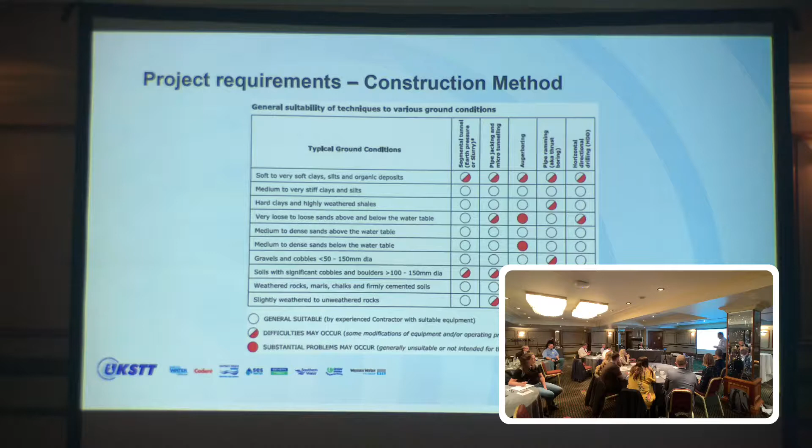Importantly, there are all the different methods, not necessarily an exclusive list, but across the top there we've got segmental tunneling, pipe jacking, auger bore, pipe ramming and HDD. This is kind of a typical, if you like, rule of thumb table for when some of these methods apply to the project that you've got. I won't go through that exclusively, but it's important to realise that there are all of these methods, and whilst we're concentrating on pipe jacking today, there's a process of selection that goes through and that leads you to have a pipe jacking proposal.

So some key factors that will affect the performance, affect the construction method, will be the end user requirements. So whether they want man access. So for example, if you put in a horizontal directional drill, you won't necessarily have shaft structures, you won't necessarily have a tunnel or a pipe to be able to get into.

The accuracy of the final product pipe in its location. So again, if you're looking at putting in a rising main, very often they can be drilled in on an arc. They're not that sensitive to the need to go through on gravity. Whereas obviously if you've got a gravity sewer with two fixed points, you've got to go from A to B, so you need more accuracy.

The diameter, design life could be an issue that you need to consider. In some of these instances, I'm thinking now of highway projects where they're perhaps looking for a 120-year design life, that could lead you towards a solution where you need precast concrete, and hence things like auger boring, but particularly pipe jacking might be more prevalent. The depth below ground level, the length that you need to go with your trenchless section.

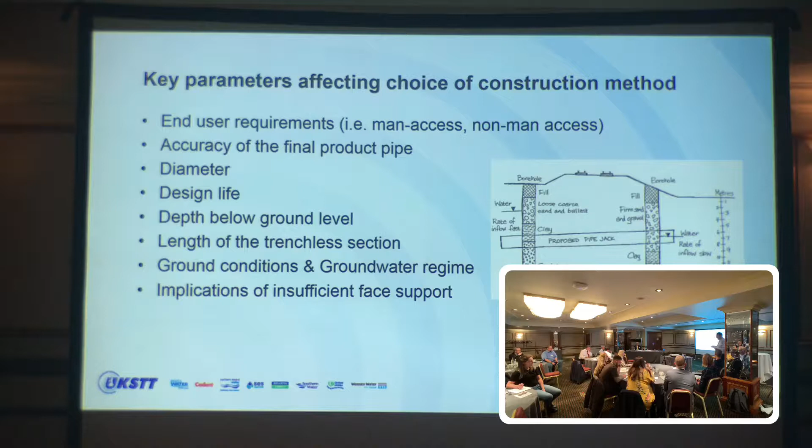Key one that I'm sure will come up quite a lot today. Everything will come back to risk, and embedded with the risk is the ground conditions and then the groundwater regime. The implications of not having enough face support with any of the methods. So face support, or indeed support around the tunnel or the pipe that you're installing, is inherently linked to settlement and in some instances heave. The presence of nearby services, and whether you've got any overlying structures, any building foundations, or any other features, so water courses, canals and things like that.

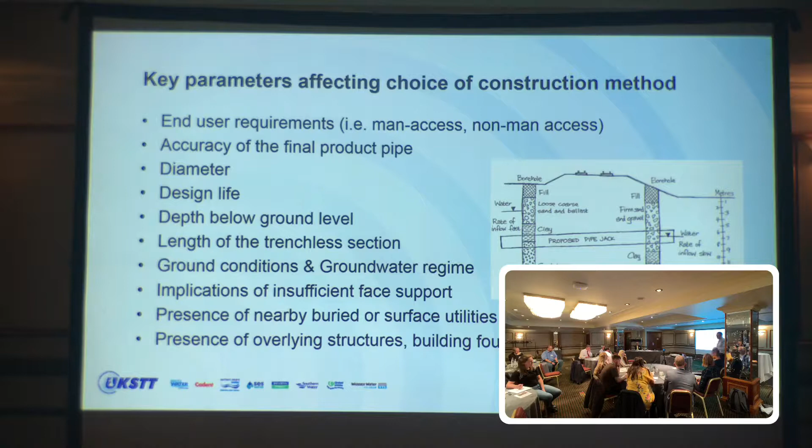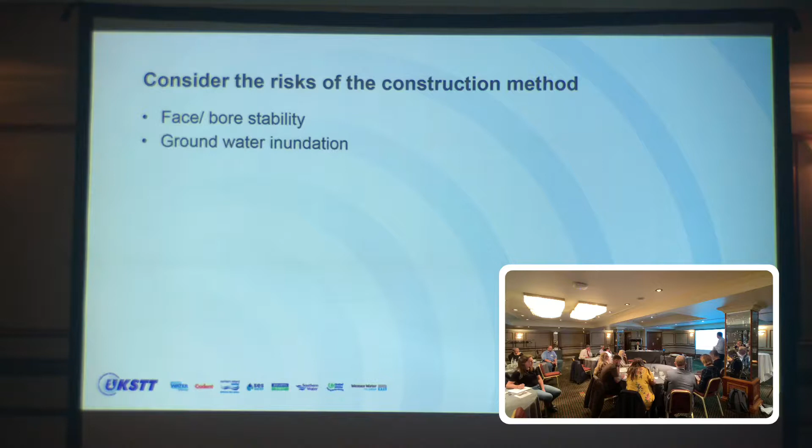Just briefly to look at some of the risks of construction. Face or bore stability, so the ability of the ground to stand whilst you're installing the pipe jack. The potential for groundwater inundation. Whether you could release any hazardous material, so if you're going through the ground and you may be in old landfill material where you could hit pockets of methane. Unexpected voiding, so mine workings are a prevalent risk, always in the ground in different areas of the country, obviously, where mining was concentrated.

Changing the groundwater regime, so by that I mean dewatering. So if you then go in and start to draw down water levels, that can have implications. Maybe it's fair to say, as an overarching statement, that if you employ a dewatering solution to assist in a scheme, you'll probably encourage settlement. Unexploded ordnance.

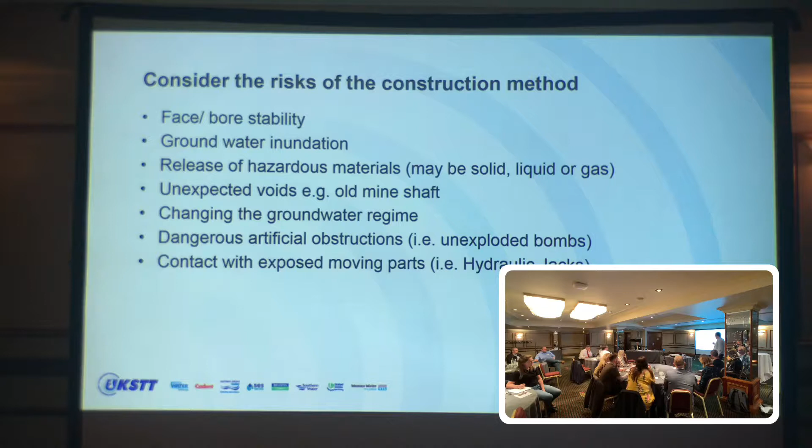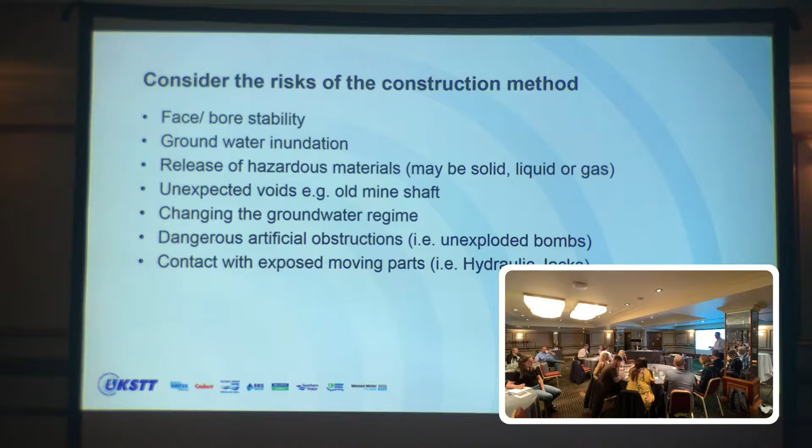Moving parts on the machine. Some of these systems will have more moving parts, depending on shaft diameters and shaft depths and working space and setups. It could be more risky to personnel. The amount of equipment that you need at ground level, so cranes, excavators, things slewing across, and whether that can fit into the site that you've got. Power supplies and materials are always a risk, maybe common to all.

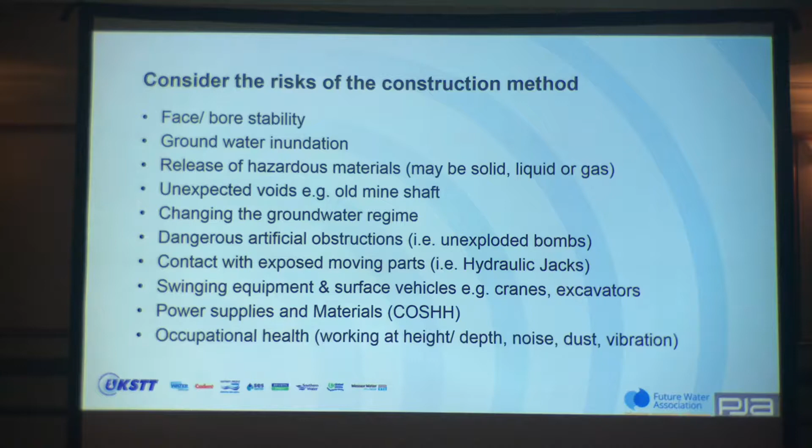And then occupational health, so some of the methods, and indeed some of the things that we're going to talk about with the pipe jacks themselves, can have benefits in terms of certainly noise, dust, vibration.

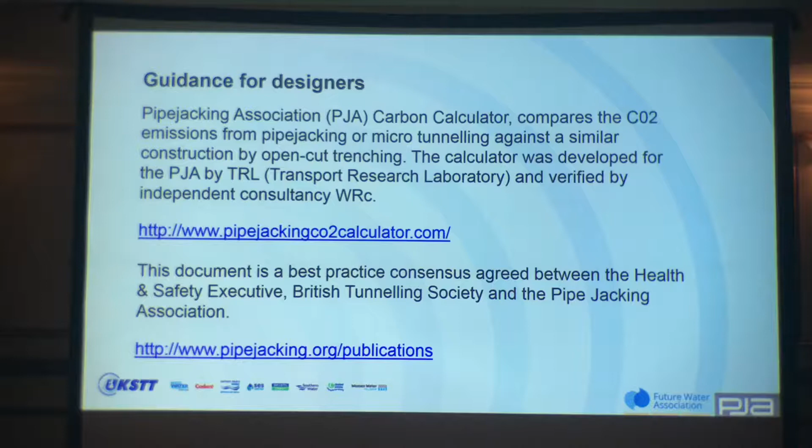When you're looking at things at a concept stage, there are a couple of things that you can also look at that certainly the PJA have promoted. So one is the carbon calculator. Now that does a direct comparison for a pipe jacking solution against an open cut installation.

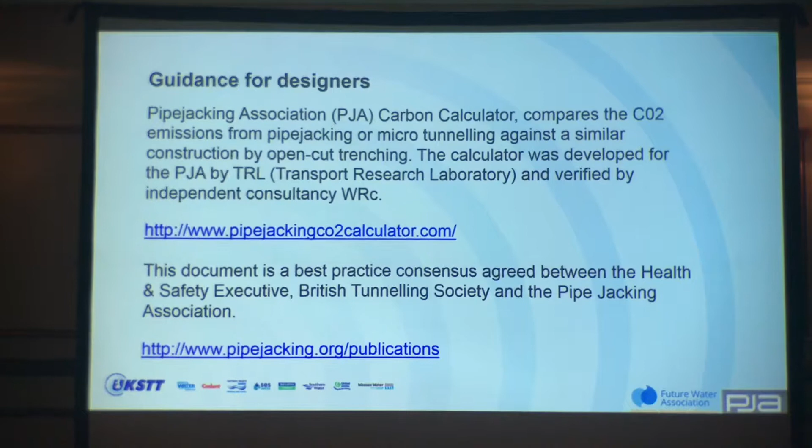So if you've got a job and you're trying to decide whether or not you could open cut it or whether you could pipe jack it, you put in a series of variables. I think it's kind of the length, the depth, the diameter, and what it does is it does a CO2 check to try and help you understand where it might be more beneficial to go to a trenchless solution.

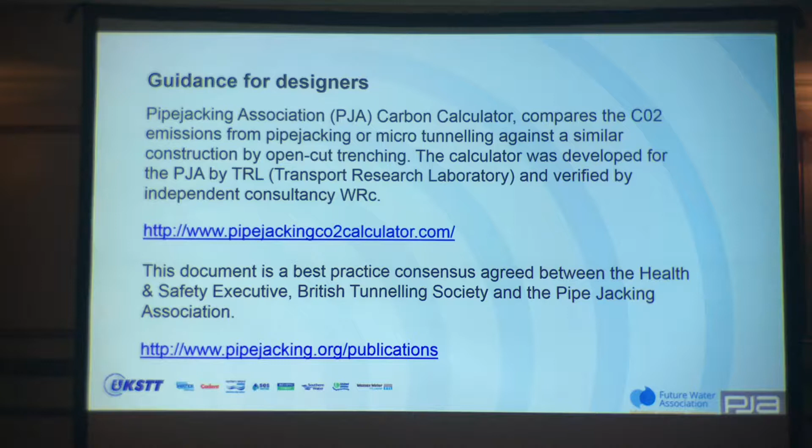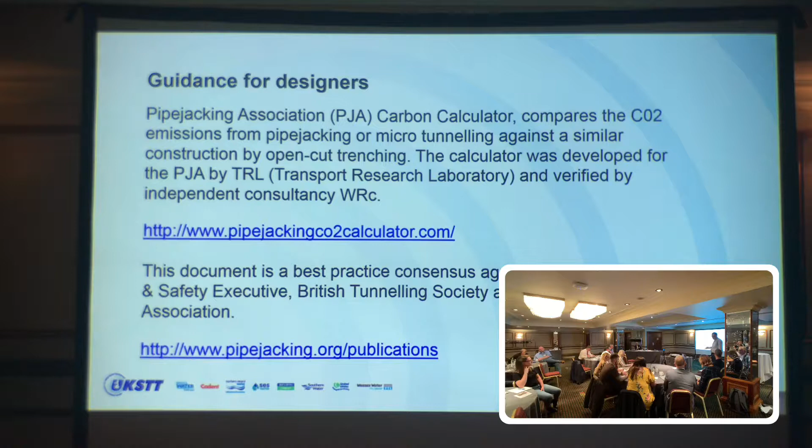And the second one is the guidance document that many of you will know, Guidance for Designers. It was a document that was produced between the Health and Safety Executive, the British Tunnelling Society and itself, which is that document there. I'm going to pick up the two sections to that just in a little while.

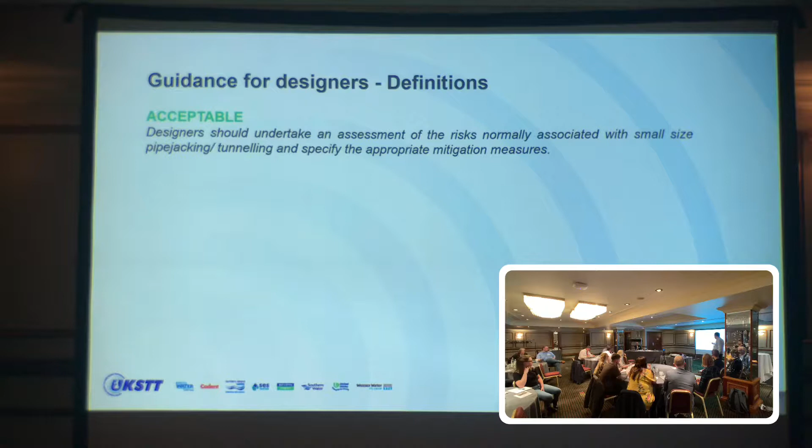But the Guidance for Designers gives you some advice on diameters for pipe jacking and lengths, and it's got a series of definitions. So you'll see on the table, and when I come on to the next slide, I'll go through it. But you'll see there's the red, amber, green. So green is effectively where designers need to undertake an assessment of the risks, if you like. It's the normal risks that may be associated with the pipe jacking method.

Amber is to avoid it, so if you like, you can see there that it's stepped up, so the designers need to undertake a robust risk assessment, and you need to propose suitable mitigation measures. You may need to seek advice. This is a bit of an old term there with the planning supervisor and coordinator, but you may need to seek advice across the project, and if you like, you need to demonstrate that what you're doing is the right thing to do.

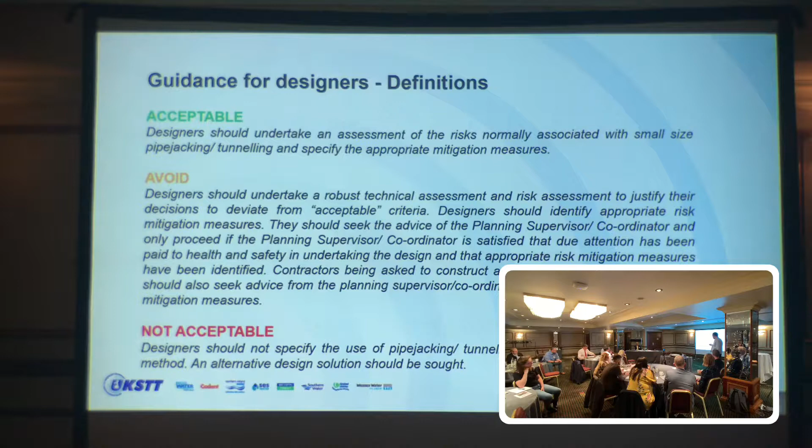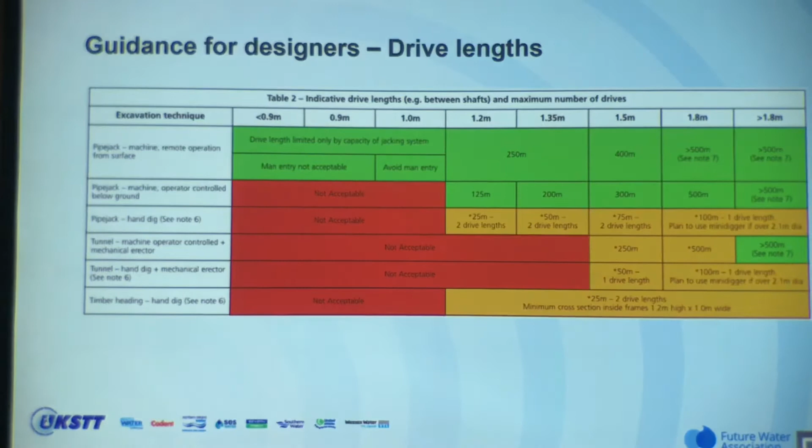So you can see that really, along the top line you can do most things, but say for a pipe jack, second line down there, a pipe jack where the operator needs to control the machine from below ground, straight away that doesn't become acceptable until you're at a diameter of 1.2. And the second part of that table is on drive lengths. So again, if I go again for line 2, the pipe jack controlled from below ground, you've got a diameter of 1.2, and so the suggestion is that the indicative drive length is about 125 metres.

Now I would say in terms of this table that obviously technologies do move on. I can't remember the date that this was agreed. It's about seven or 8 years old, I think. But this is currently under review as well.

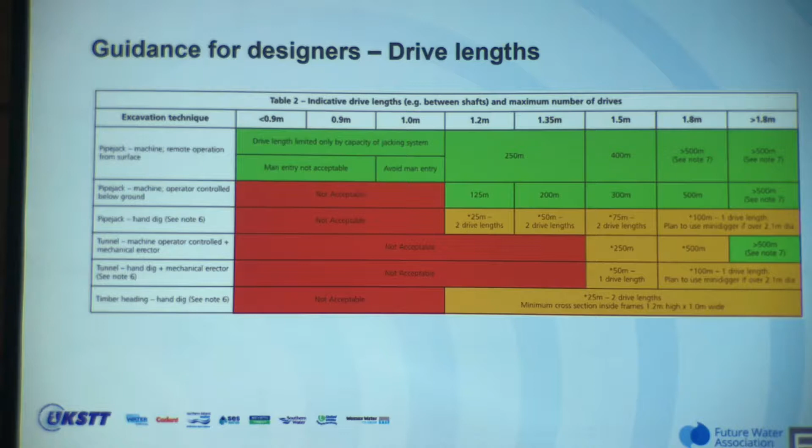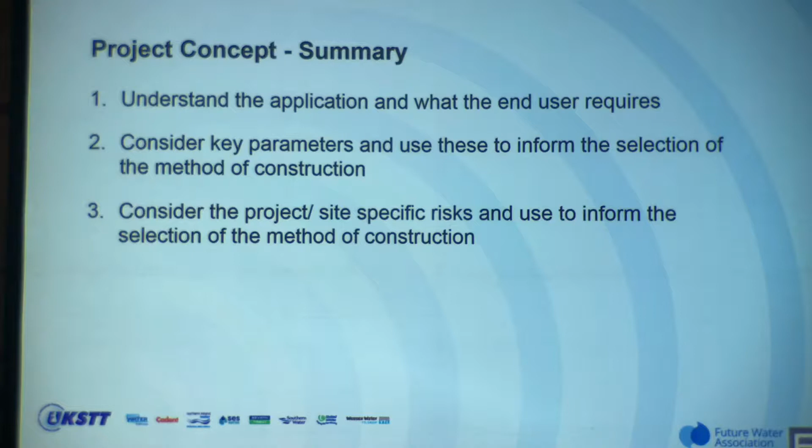So just in summary, you need to understand the application, particularly what the end user wants out of the job. You need to consider the parameters and use those to inform the method of selection. Consider the project and the site-specific risks again, and use those to inform the method of selection. Refer to any best practice and adhere to that practice where you can, and that will help to set notional diameters and indeed shaft locations.

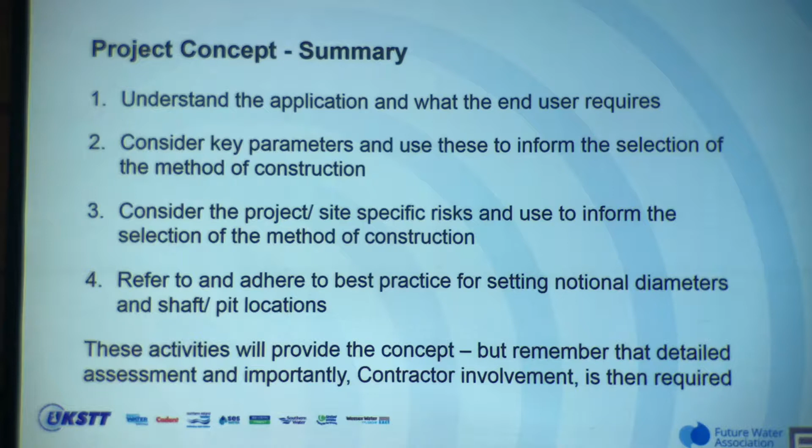And if you do all of that, those activities will provide concept, but remember that's not a detailed design. At that stage you really need to go on to do the detailed assessment, but importantly that's really the point at which you need to involve a contractor to start talking to them about the plant and the equipment and the limitations on that plant and equipment.

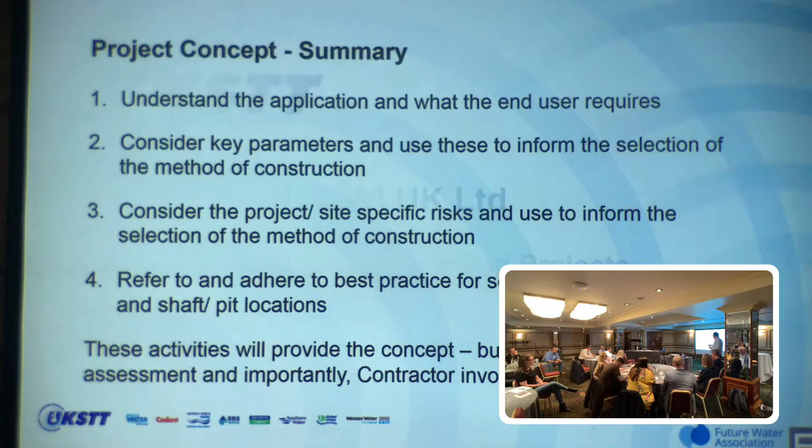So that's just a bit about the concept. I'm now going to hand over to Dave, who's going to talk a little bit about site investigation.

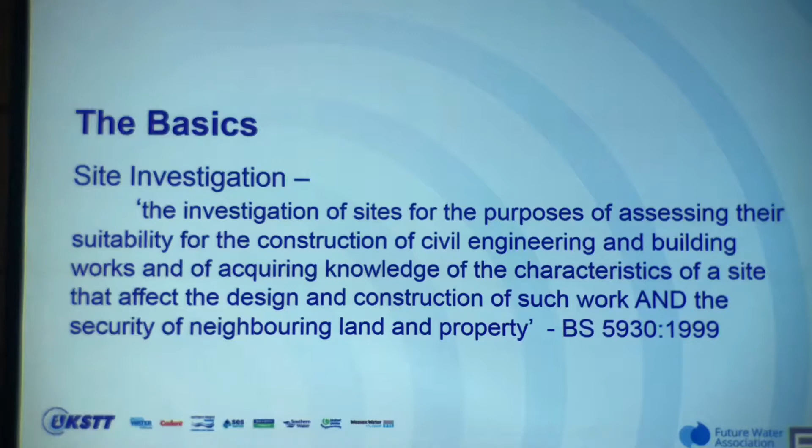I've emphasised the 'and' bit there because obviously with trenchless construction, we're generally building under something, so we've got to consider what you're building underneath and the effects you may have. Just going through the basics again. Site investigation, SI, or ground investigation, GI. Now site investigation, I tend to say, studies the site as a whole. You're not just looking at the ground conditions, you're looking at the geographical setting, land use, hydrological setting, historical land use. This all informs the picture of the ground conditions as a whole.

The ground investigation is the actual intrusive or non-intrusive works where you have your exploratory holes, in-situ testing, CPTs. Your non-intrusive works can be GPR, ground penetrating radar, seismics, resistivity, all pulled together to give you a picture of what the ground is that you could be constructing through. What's it like for a pipe jacking project? Well, it's much the same for any other project really. You're trying to confirm the ground conditions, what you think's there, confirming what the early stage studies have informed you, which I'll go on to later, and identify ground risks to the contractor and the development as a whole.

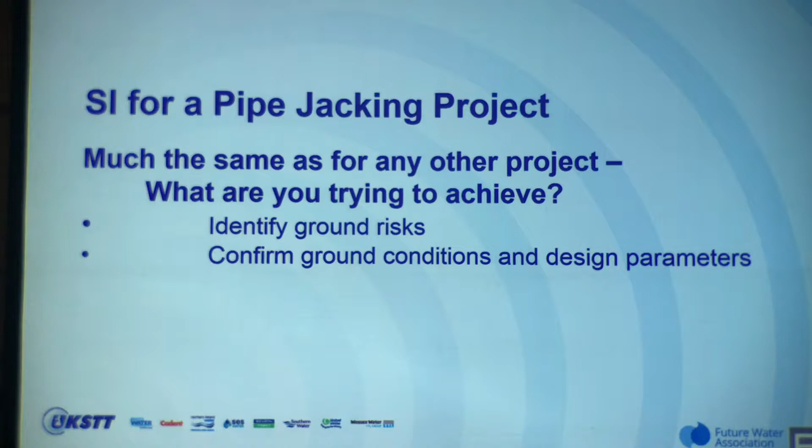First steps, desk study. Pipe jacking generally is a small section of a longer scheme, and the desk study will generally be done for the whole scheme, so you'd hope that a lot of this work won't be just particular to the pipe jack element. There'll be a site-wide desk study, as is more often the case. What you need to look at is geographical setting, which gives an idea of what the ground conditions could be, and as Jim mentioned, infill ground or past land use will give you an idea of the ground conditions or any risks. There's a lot of information available that's free to view for your desk study, related to geology, flood risk mapping, aquifer maps, UXO surveys as well.

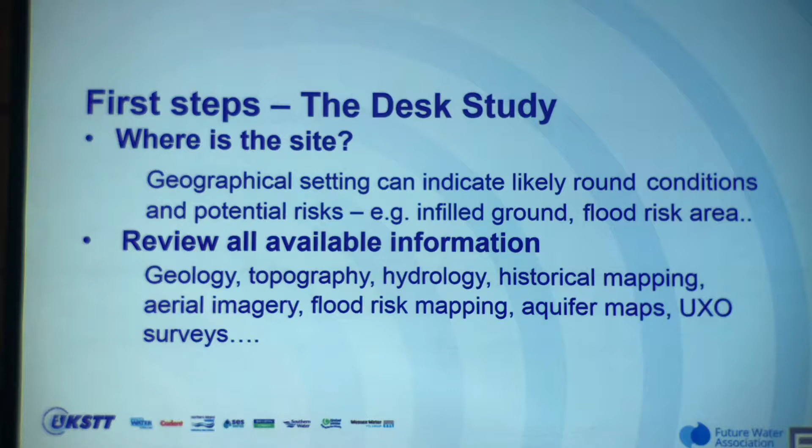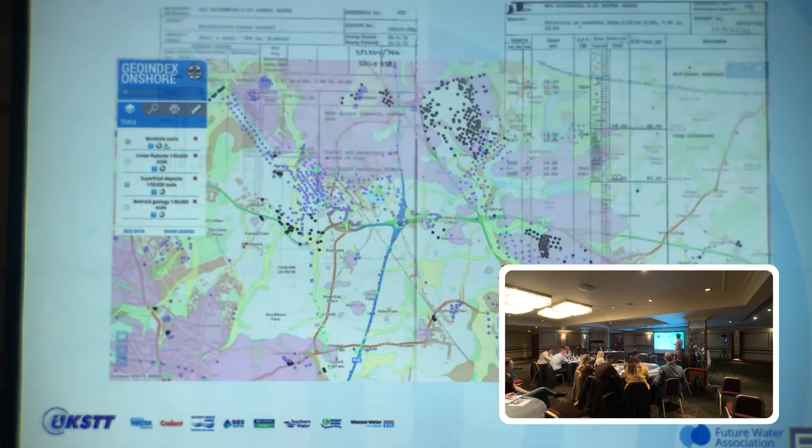I forgot about the slide. Sorry, this borehole is one of these green ones here, just there. You've got made ground, a bit of a mixture of everything really. You've got a thin band of gravel and sand there, which we'll come back to, the pink stuff. And then you're into the very stiff red-brown weathered mudstone.

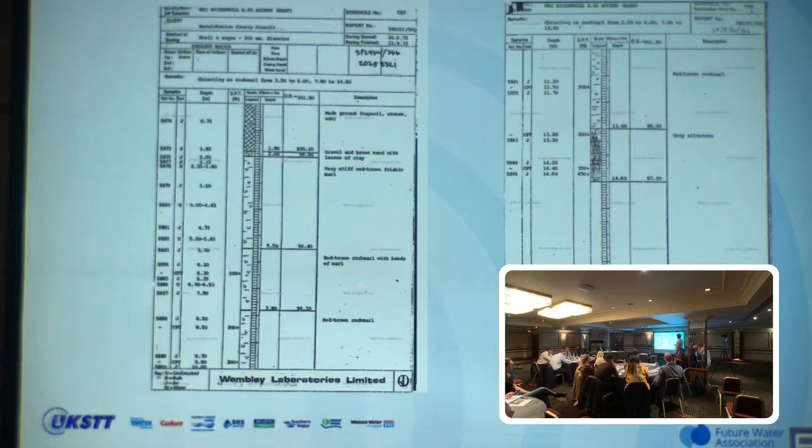So all this information is very useful. It's freely available, so it can be pulled together. We're quite early in the scheme, so you're kind of eliminating risks at a very early stage, and obviously providing information to the contractor for the actual pipe jack process itself.

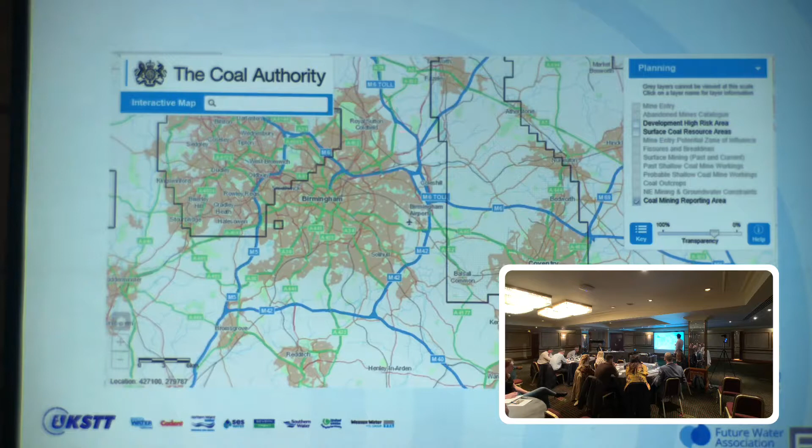Site reconnaissance is quite important as well. You need to confirm what your desk study so far has told you. The land use could have changed, the hydrological regime could have changed. Another thing is you've got to confirm accessibility for the GI plant contractors. If you're in a ploughed field, you need to know what kind of accessibility you're going to have. And also review the location of works.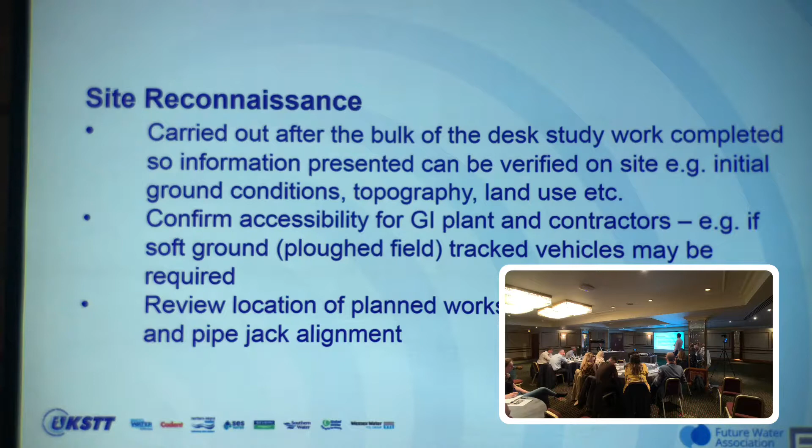A lot of the submissions, certainly to Highways England, people want to see physical photographs, current photographs of what the site looks like now, from the drive and reception pits or shafts and the full pipe jack alignment. So it's a useful thing to do.

Ground investigation itself: the method depends on accessibility, ground conditions and required depth. You can imagine there's different sizes of rigs. If you've got a trenched sort of installation, generally trial pitting's more than adequate because you're not going too deep. Trial pits you can get down to 4.5 metres. You get a nice visualization of the ground. You take large bulk samples for testing.

As you get deeper, particularly with the pipe jack itself, if it's deeper, which generally there's a reason that method's been chosen, boreholes are obviously involved, and depending on how strong the ground is, you've got different options for borehole rigs. With the pipe jack, you've got to target the depth that the pipe jack is going to be going at.

The contractor more often wants to know specific information, so speak to them, understand what parameters they need to design or pick what plant they're going to use, and for pricing as well. So it's things like the grading, if it's granular material, see what portions are sand, portions are gravel, and the strength of any clay or rock.

And there's also the temporary works, and certainly the permanent works with regards to shafts. You need to get a good understanding of the full depth of the ground to the base of the shaft or the pit and beyond, to understand what's going on and what implications it could have with any ground heave or lateral loading of the structure.

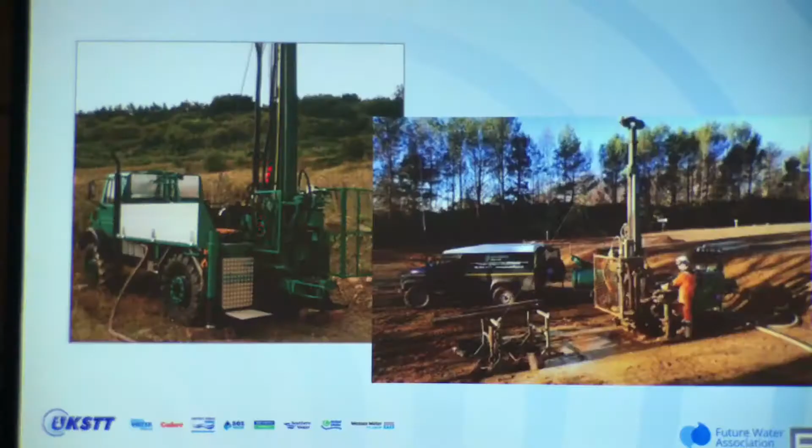This has got an example of rigs. This is a big old Unimog army truck with a rig on. Normally you can get 100 plus metres with one of these rotary rigs. You can see this is reasonably good ground. If you've got one of these, you're going to sink if you go into a ploughed field. This does the same thing. It's a smaller setup. It's a tracked rig, so it's better for soft ground.

Maybe you'd not get as deep with that, because it's a different matter putting the borehole down, but then trying to pull casing or barrels up, you've got to have enough grunt to get them out of the ground as well. But with this you can certainly get to 30, 50 metres or something like that.

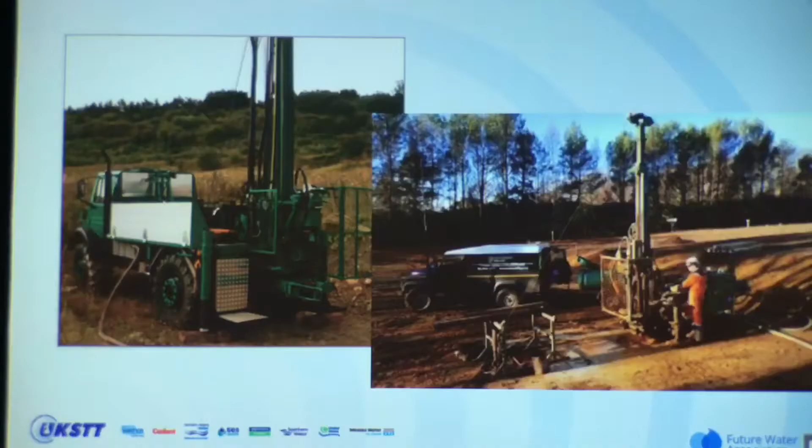And then this is the old cable percussive shell and auger rig. You might see a lot of them on the motorways getting pulled behind Land Rovers. This is a fairly cheap and straightforward method for getting down to maybe 30 metres, which is a general average maximum depth you go with that.

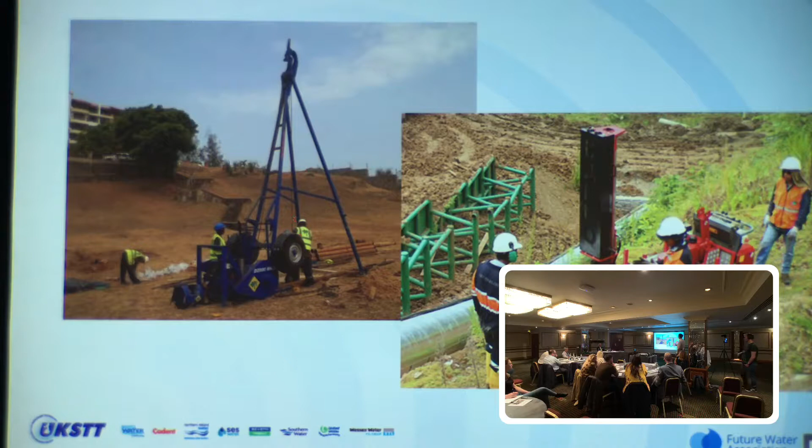Again, that's good to get through gravels, and you can take undisturbed samples, but they're all a bit disturbed, and certainly you get large bulk samples from your granular deposits. And you can also do SPTs, standard penetration tests, which give you an indirect strength result from the ground. SPTs can be done within these rotary rigs as well.

And the smaller rig, this is a windowless sampler rig. You can see it's a lot smaller. That can go in the back of a Transit, basically. But you can see the access there is quite limited. So these can get down to 20 metres, maybe a bit more depending on ground conditions.

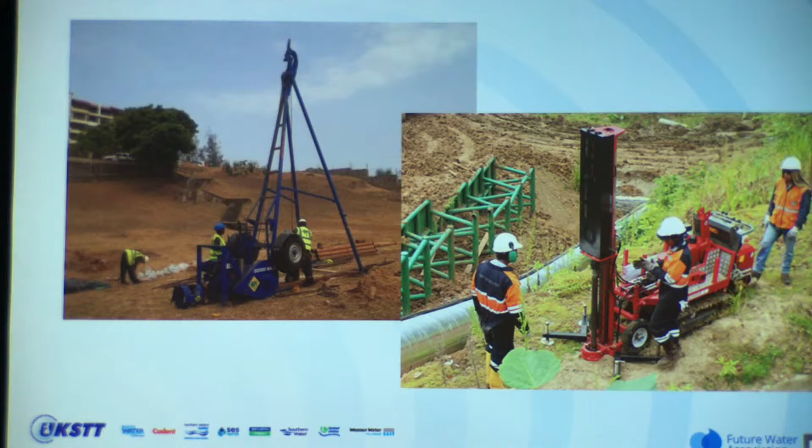But if you're doing a pipe jack underneath an embankment or something like that, where the access is constrained on top of the embankment, these are good methods for getting into a highway verge or a railway cess to get a borehole down through the embankment material. You may not be drilling through the embankment material for your pipe jack, but it gives you an idea of what the embankment's made of, for settlement analysis. Then spacing and frequency of boreholes.

For the structures, certainly for your shafts and pumping stations, ideally three points of investigation are deemed a minimum, so you can triangulate the ground conditions.

There's a lot of people don't like paying for that level of investigation. You can reduce the scope of that if you know from the geological plans and your previous boreholes. If there's a lot of previous borehole information in that area, obviously you don't need to; if it's fairly current you can rely on it, and you don't have to go in and do the same again. And certainly where you have a couple of boreholes, you can maybe supplement that with trial pits just to prove the depth of, for instance, a shallow rock head.

For linear structures, for pipelines and roads, the frequency depends on the overall length and where you're expecting things to change. If you're going from a greenfield site into a built-up area, chances are in the greenfield site the ground conditions aren't going to change a great deal over that length. But in a built-up area, you maybe want to concentrate a bit more. Certainly with the desk study section as well, just seeing what's being built on that section.

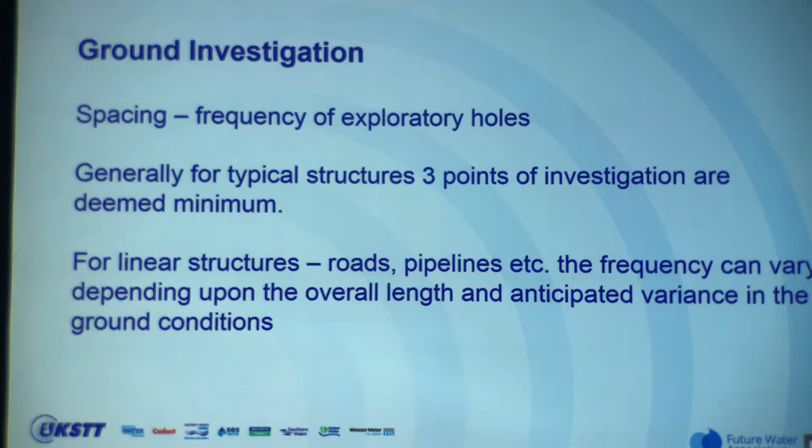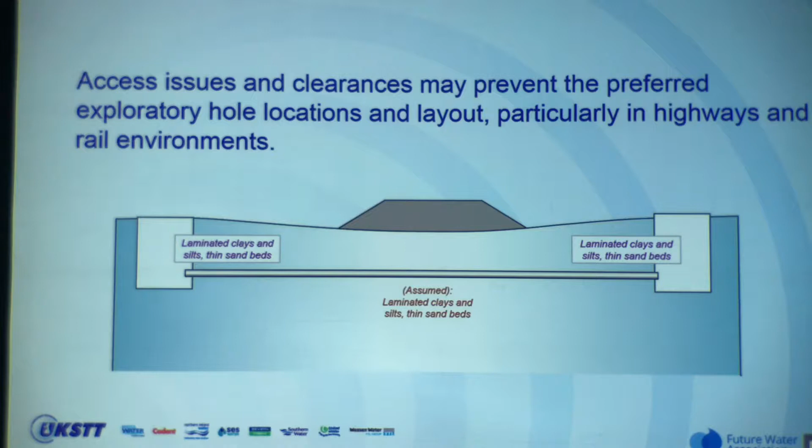Touching on this earlier, access issues may prevent the preferred exploratory location. So you have a railway or highway embankments. So your pipe jack profile, you've got a borehole here and a borehole here. More often than not, you're okay. It depends on where you are around the country. If everything's fairly horizontally laid, the different strata, there's a good chance the ground conditions here are going to make sense here and here.

But sometimes, certainly in superficial deposits, you can get lateral variation. So you could get something like a laminated clay, predominantly clay with bands of silt or sand. Then over a distance, it changes to predominantly sand with bands of clay and silt. So there are different properties that react differently to being disturbed by the drilling method.

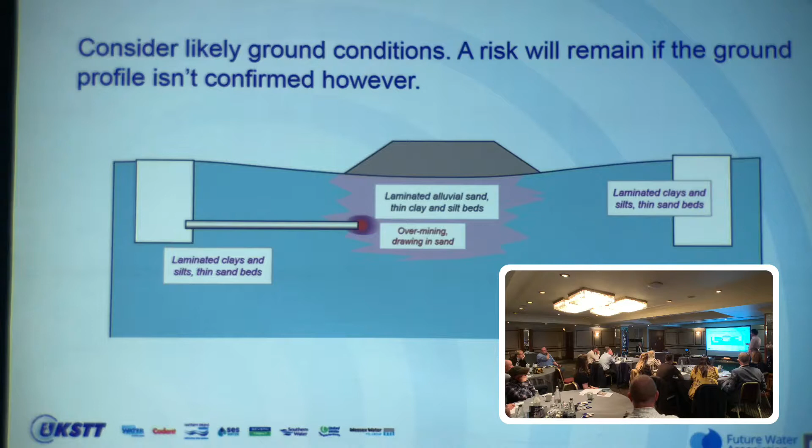Ideally, in this situation, you get a borehole up there, straight through there, or this side. Obviously, that's not often the case. But if that's a risk that you think's viable, that needs to be highlighted. Then it's someone else's decision to say, well, hang on till you get that borehole. If not, we'll just have to plough on and work around the worst case.

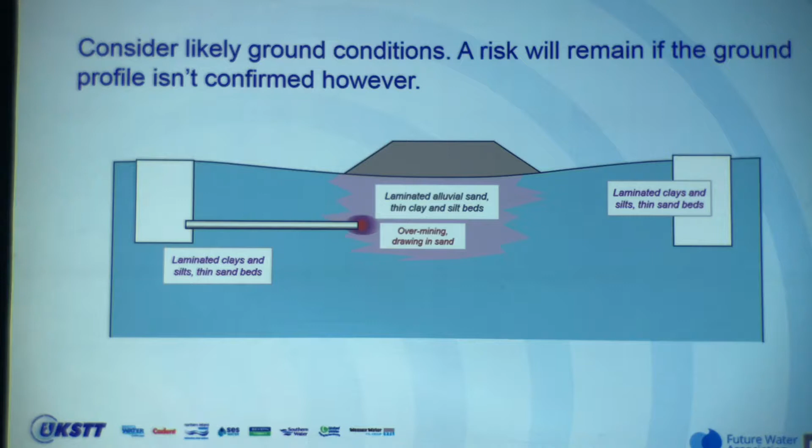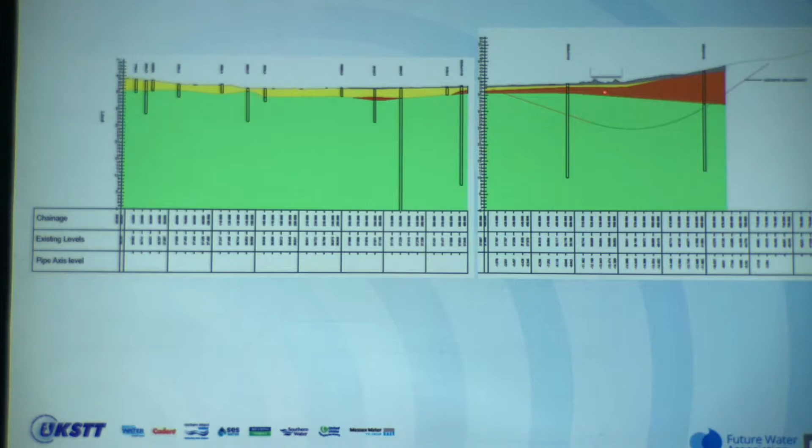This is a section that we've generated for another job. This is actually HDD. You can see the individual boreholes. You create a nice long section. This is in chalk down in the southeast, and you can see the chalk level dips. You've got the Lambeth Group clay strata here, alluvium, and the grey material is made ground fill. So generally it is a case of joining the dots. The frequency of these boreholes all helps to develop the picture, so you can have some confidence as you generate these sections.

Now you've got your borehole logs. Now what? Lab testing. The driller will have a good idea what material he's hitting. There'll be an engineer on site checking material, but they'll do a spot test on the material coming out of the ground. They won't check every single thing. So the logging within the lab will give you more detail on the material. There's different testing for grading and strength, which can directly inform the design and be passed on to the contractor for the pipe jack itself. For temporary works in the shafts, we do a lot of strength testing to understand how the ground's going to react to having a shaft in place.

Chemical tests, again, there's the attack on any buried concrete, the sulfate content of the ground. There's any contaminants that could be a risk to the workforce during the construction of the shaft or pipe jack. And then there's the waste acceptance criteria. The spoil that comes out has to be taken away. It's not to be used on site, and that has to be classified to make sure it's nothing too nasty, or inert, so it can be disposed of at a suitable site.

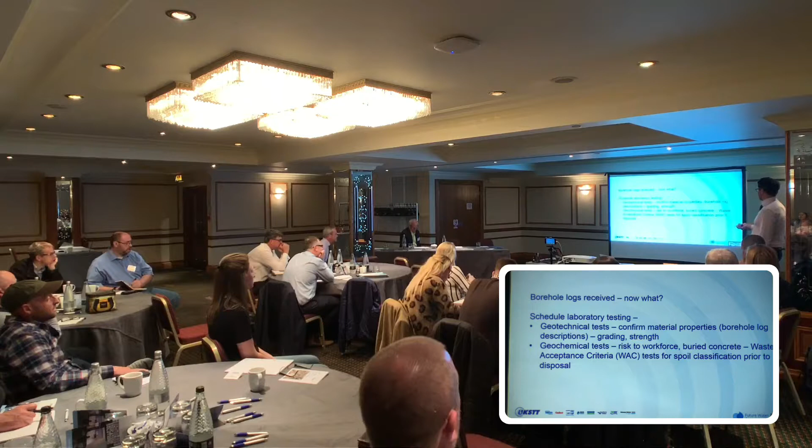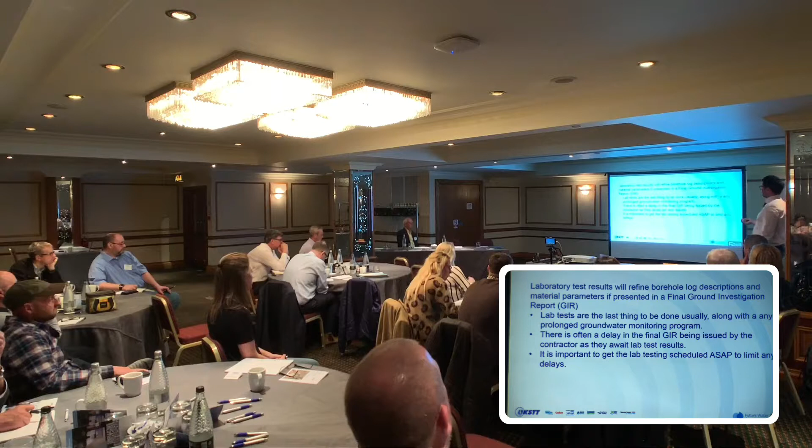So the lab results will refine the borehole log description, so it's important that you get someone who knows what they're talking about to allocate or schedule the correct testing. Certainly most GI contractors, certainly the larger groups, are quite inquisitive. They want to know what they're drilling for, what the ground investigation is for. They'll sometimes prompt you as to what testing you need to better inform the design and the contractor.

Lab testing is generally the last thing you wait for, unless you have a groundwater monitoring program which can last as long as you want it to, ideally as long as possible. So that's the last thing that ties in the ground investigation report itself. So as soon as the logs come in, get someone who knows what they're talking about to look at the logs, get that testing schedule sent back and get it underway ASAP.

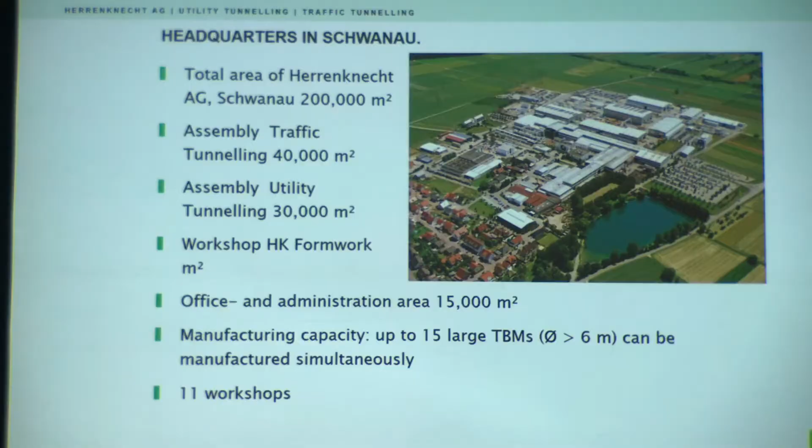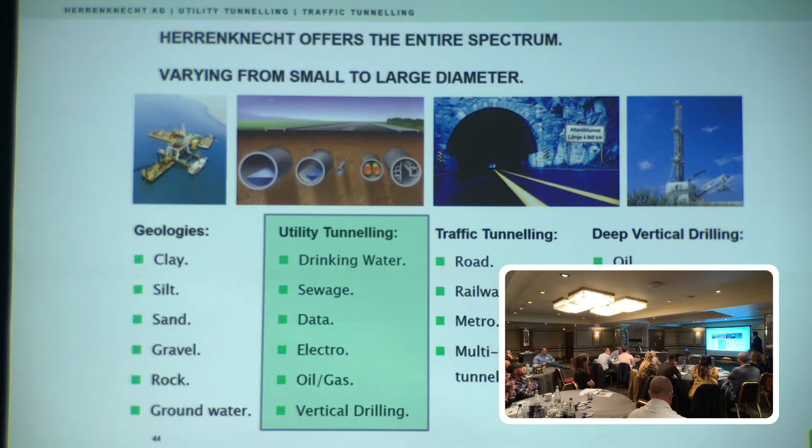We don't just do small machines, we do big machines, HDD, geothermal, oil drilling, and all sorts of fancy tunnelling machines and tunnelling ancillary equipment, rolling stock, shutters, segment moulds, and such like. So we're in this category today. This is what the company does. Deals with all ground conditions, all styles of tunnelling, so utility, which tends to be the small stuff, traffic, which is what we would tend to call Hollywood tunnelling or Hollywood mining, so Crossrail, Jubilee line, Channel Tunnel, etc. We also have a deep drilling division.

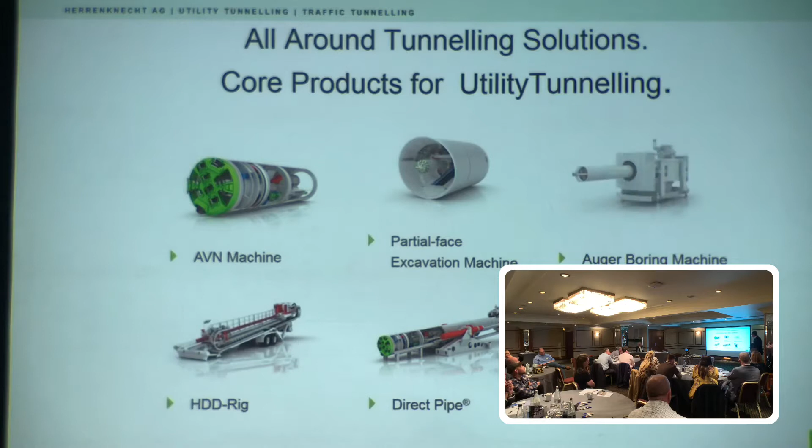Okay, this is more on to where we are with today's presentation. These are the types of machines or techniques that you will see in the utility industry. The AVN machine is a slurry, basically a face pressure machine, slurry machine. As Graham suggests, there are other manufacturers. Iseki would be one, and there are several contractors in the UK that run Iseki fleets, not Herrenknecht fleets.

They're closed face machines. They deal with ground pressure, they deal with water pressure, they deal with it in several ways, but mostly using pressurised slurry and a slurry circuit. They tend to be non-man entry. Although they get big enough that you can go in, that's what the safety, the environmental, all of the things that go with trying to do things in a best and improved manner nowadays requires.

Old style tunnelling machines are still around, still very valid. If you've got cohesive soils, dry soils, nothing wrong with these type of machines. They can either be an excavator or road header, depending on how hard your ground is. And tends to be SPTs less than 30. Tends to require you to have cohesive, not all the time.

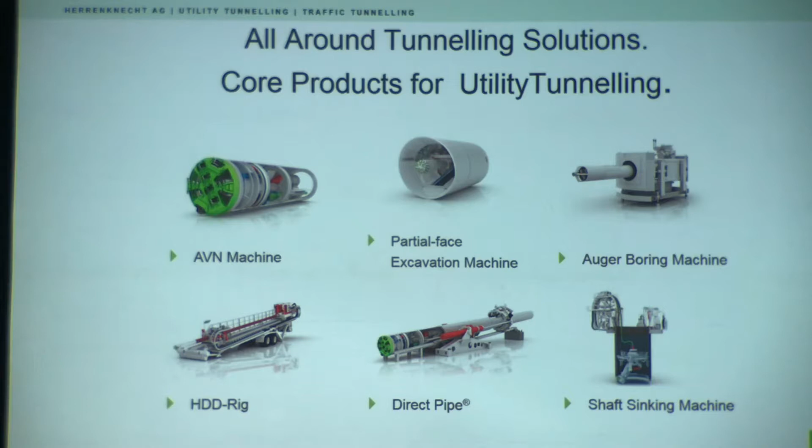Auger boring, guided auger boring, similar to some of the techniques. It's got a guidance shoe and pilot rods in it, and then auger tubes. HDD, which I'm not going to talk about today, but a lot of you people in the room will have dealt with.

A particular product that we make as a group is called direct pipe. It was introduced and developed as a response to HDD people running amok and putting bentonite everywhere when they started to go bigger and bigger and bigger. So we were asked by various concerned customers and clients to develop a system technique where we could put bigger and bigger pipes in without causing an environmental disaster, normally referred to in the HDD industry as frack out.

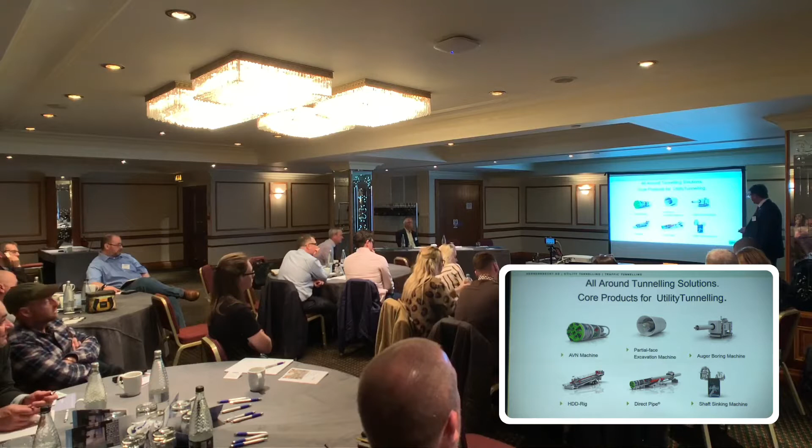Something extra special we do as part of the utility range is shaft sinking machines for high water pressure and deep uses. There's presently 4 of these in operation around the world, one in Singapore, one in France, one in Spain, and there is one in the United Kingdom at Sirius Minerals in North Yorkshire, which has recently gone over 100 metres, which is the deepest we've ever done one. So if you're in the game of sinking very deep shafts or very awkward shafts, these are the tools.

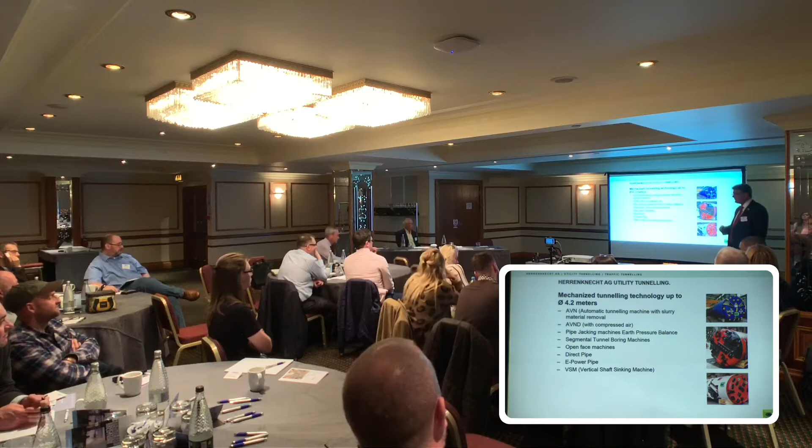Okay, typically utility tunnelling goes up to a size of machine up to 4.2 metres. If you were to suggest that in the United Kingdom, people would probably chase you out of the room. In the Middle East, it's a very common size. For 4.2 excavated diameter, you get about a 3.6 tunnel. Various versions of machines that the various manufacturers and ourselves produce. Typical standard tunnelling machine with compressed air. Compressed air is when you have ground conditions, you have to support the ground using external tools because you want to change the tooling. The tooling wears out in the case of the ground.

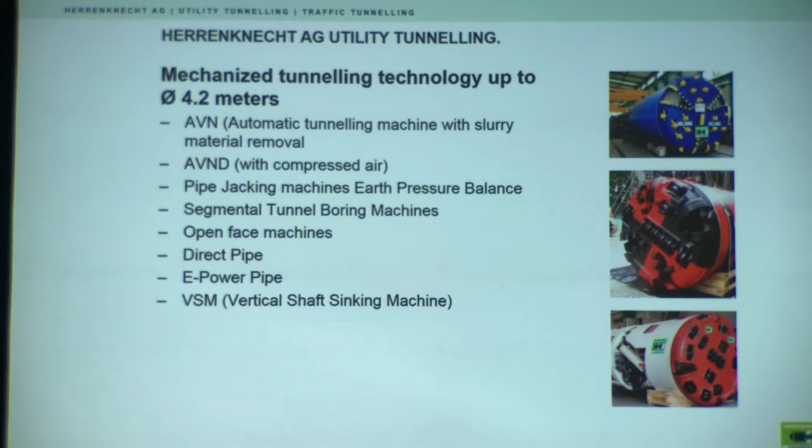With earth pressure balance machines, they basically excavate the soil, fill the head up with excavated soil so it creates a pressure on the face, and this controls settlement. All tunnelling creates settlement. Anybody tells you differently, I won't say they're lying, but they're on the edge of it. There are a lot of techniques that will improve the circumstance, and earth pressure balance is one. All of the Crossrail machines, bar 2, were earth pressure balance machines, and virtually any urban tunnelling is either slurry or earth pressure balance.

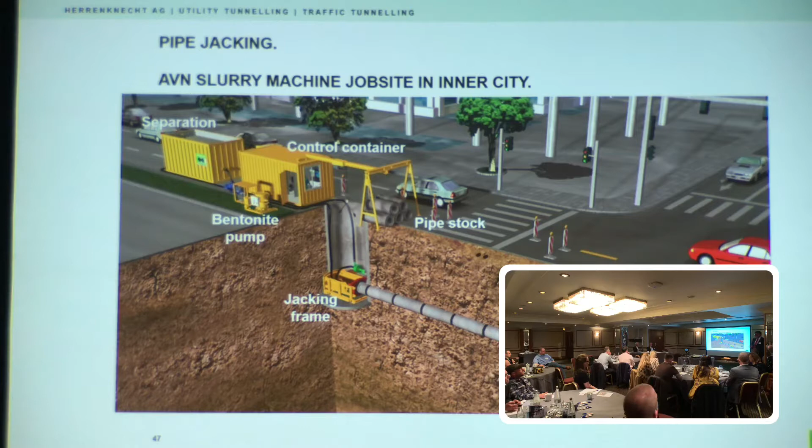That's the typical site setup you would see in an urban environment for a microtunneling pipe jacking type operation. Shaft, jacking rig, some form of crane, control and power pack and electrical distribution, and some sort of slurry separation equipment. So screens, hydrocyclones, normally compact, normally in an ISO 20-foot container format. That's the parts of a slurry tunneling machine. That happens to be ours, obviously.

The cutting head comes in various formats for the type of soils you're going to be tackling. Drive units and chamber. So there is a slurry chamber where there is a pressure. This is what helps prevent settlement on the surface. So you're forever maintaining a pressure inside this. You have slurry, bentonite or water, depending on what ground you're going through. So you have an inline and an outline, guidance system, and some versions of power pack or control, power equipment. Sometimes the machines have hydraulic lines fed all the way from the surface, and sometimes they have electrical power because you're going a long way.

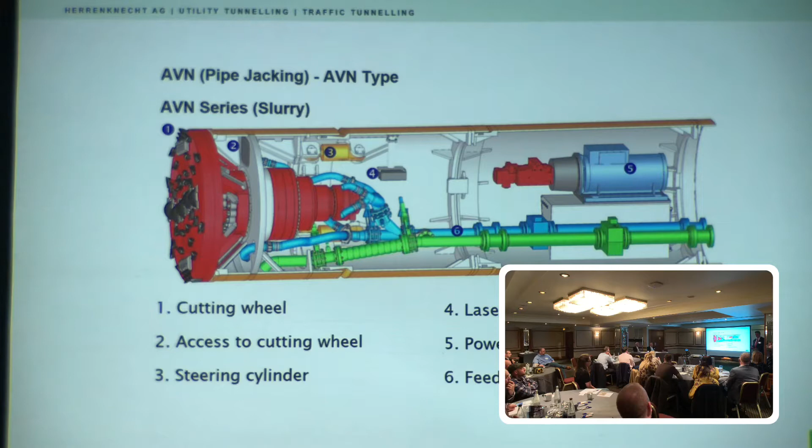Okay, a little bit of what Dave was saying. Do not, under any circumstance, make the ground suit the machine. Choose the machine that's right for the ground. Choose the head that's right for the ground. I have seen many, many times where people look, as David said, and they join the dots to suit what machine they own, not what machine is suggested by the worst circumstance in the drive.

Soils come in three formats and 2 styles. 2 styles are wet and dry. 3 formats: soft, either cohesive or non-cohesive, so clay or gravels, and then hard, rocks, weak, strong, brutally strong. That's a little bit of simplification, but it's more or less the things that contractors will look at when they're being presented. And that's a full rock tunneling machine head.

Mixed ground head, so that's just got rollers on it, basically. Rock cutting rollers for very hard rocks. Mixed ground is going to be versions of boulders, stones, large particles and such like. Typical in that would be chalk. Chalk has a lot of flints in it. You need something to break up the flint, so you need rock rollers here and there. And then you have the pure soft ground, clays, sands, small gravels.

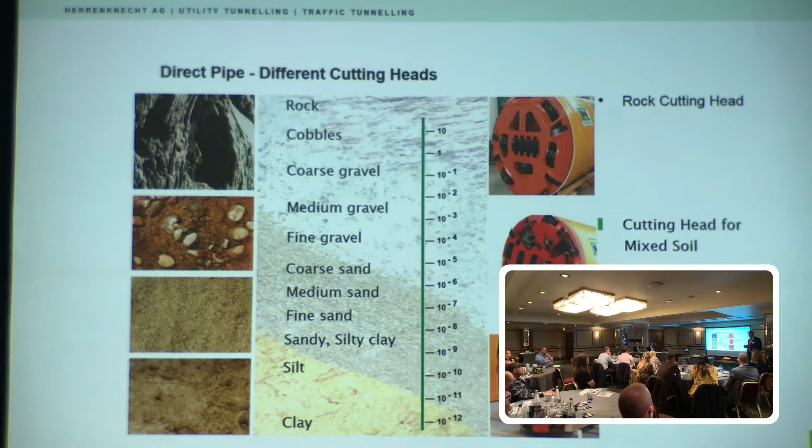A man in the room would tell me that Iseki deal with clay better than Herrenknecht do, and he's perfectly welcome to his opinion. And since I used to work for a contractor that has a whole Iseki fleet, I would have a varying opinion on it.

However, clay is sticky. Clay and slurry don't like each other. However, if you've got mixed clays, sands, gravels, water pressure, you are going to be in one of these machines. So you've got to end up cleaning the slurry that goes in and out of the tunnel all the time. You'll probably end up with a centrifuge on your site as part of the separation equipment.

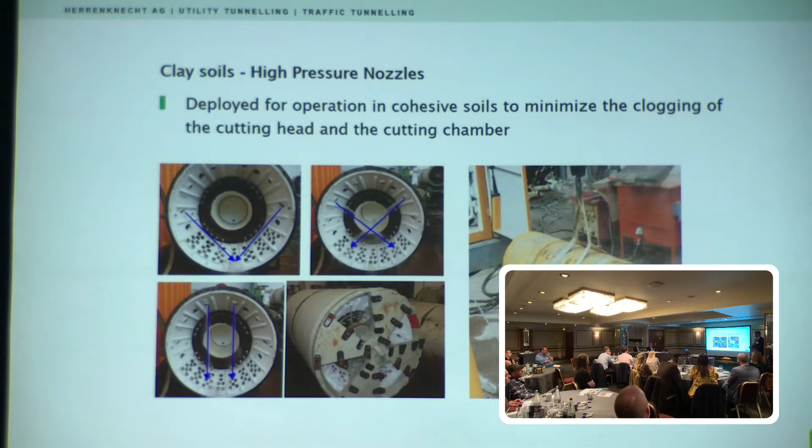Most of the microtunneling equipment, whether it be EPB or the varying forms of slurry, comes with a control container. In the control container is normally a hydraulic power pack, electrical switch gear for pumps, hydraulic power pack for both the tunneling machine and the jacking frame in the shaft bottom.

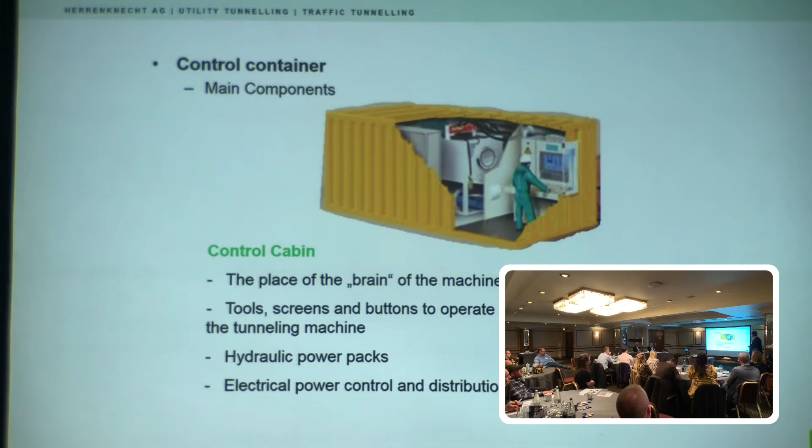Separation plant. As I say, normally shaking tables, so you've got a recirculation tank and a pump, shaking tables, hydrocyclones, tends to have a buffer tank, not always necessarily the case, and you can go on from there, ultra-fine screens, centrifuges, belt presses. There's a whole world of slurry separation and soil and slurry conditioning that you can use.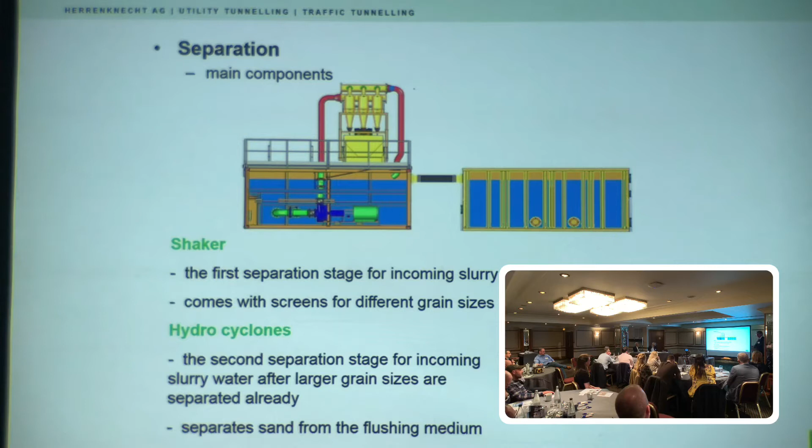A lot of people may have seen the HDD people before in operation. They come with this kind of gear; their pumping equipment tends to be ultra high pressure and flow. Applications, other than just typical urban environment. Mr. Monteith and myself did a long sea outfall in Brighton, just about 2 metres short of a kilometre.

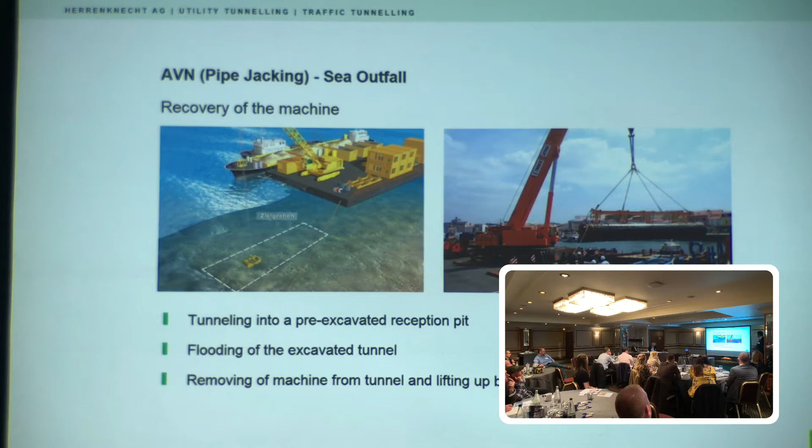It has obvious advantages, and you can do long distances, something I'll talk about later in the day. Usual advantages and disadvantages, but most of the advantages are environment, disturbance of people, noise, nuisance, digging up roads. That's just a function of tunneling. That was a sea outfall we did in Spain. So, reception pit, barge, and that was a tunneling machine that we recovered.

EPB pipe jacking's a similar but different technique. Although you've got a control container with power packs and such like, you tend to have what's known as a screw. There's an Archimedes screw at the back of the machine. It tends to be used more in cohesive soils because the screw forms a plug and maintains a pressure in the head.

So rather than having slurry producing a pressure in the head of your tunneling machine, you cut and break up the soil, you then compact it back inside the head, not fully compact, but that compaction and the thrust going forward provide a pressure inside the physically excavated soil. You force back onto the excavated face. That pressure that you are building up by shoving the whole machine forward is controlled by a screw. So it's basically an Archimedes screw, and that screws muck out of the chamber in the TBM.

You have to have at least some cohesive fraction in the soil, because if you've got water pressure, which you tend to have also, without cohesive soil forming a bung the water comes thundering out of the screw and you get all sorts of calamities. It tends to be a very commonly used technique in the big tunnelling machines, the big schemes, metros and railways and such like. Tends to be less well used in micro-tunnelling and the utility type, but it is available.

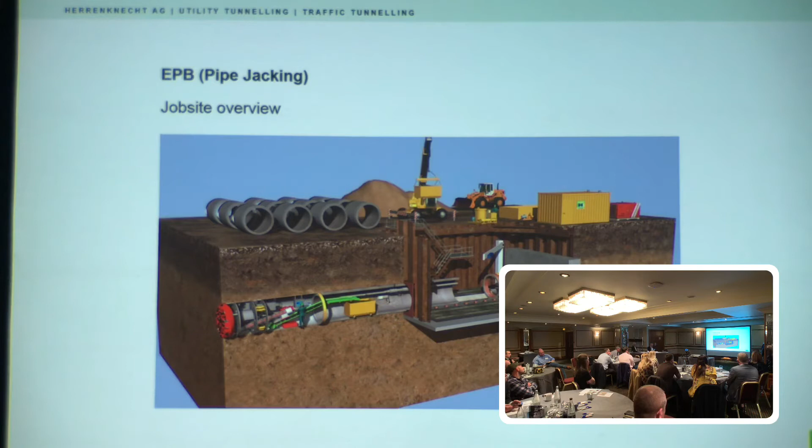And again, there's the jacking frame that jacks the pipes in, and a typical setup. That's the machine. You can see the screw there. Screws out the soil. The soil tends not to be soaking wet, because the screw tends to take the water out, onto a conveyor and into a skip. Very often EPBs are bigger than 2 meters and you have man access.

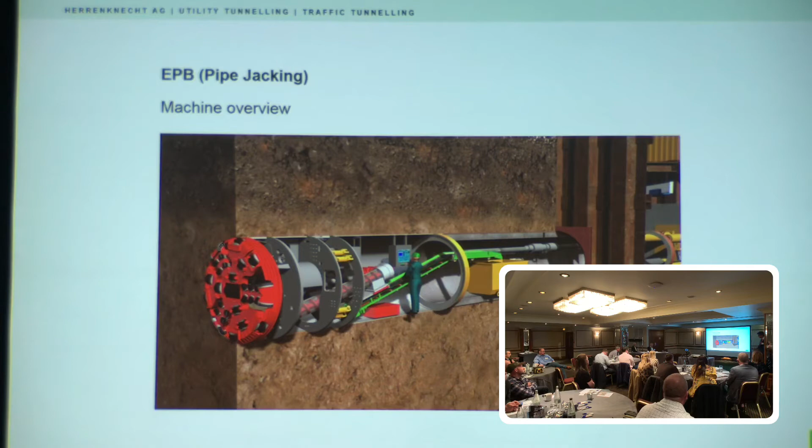Really fancy machines, retractable machines. Have you got one? I thought you got one. No. Okay. They are made, we make them.

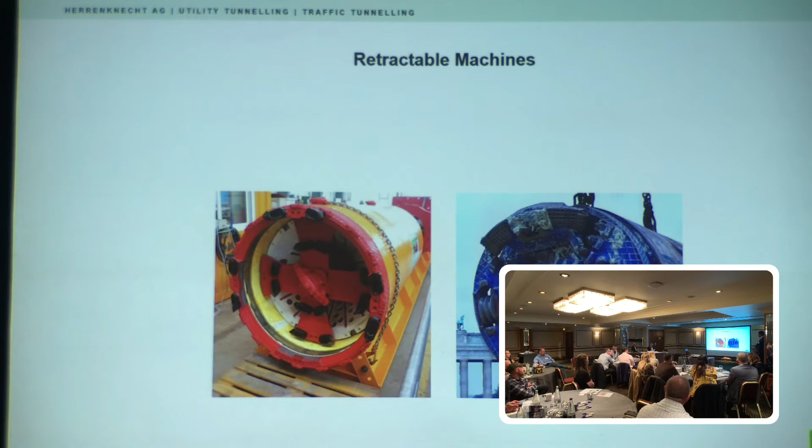Not many people go for them, whereby you build your tunnel and you actually got no shaft to go into, or you go into a blind end that's going to come at some later date. And you basically push the machine out, and the machine has a retractable head, versions of folding head, and you can actually pull it out through the tunnel.

Oldest, mechanised now, basically an open face machine. Cohesive soil, clay, dry sands I've seen it in, dry sands and gravels that have got a little bit of a clay fraction. Something where the face in front of you stands up. You can touch it, and it doesn't collapse around your ears. That's the typical sort you would see in the United Kingdom. Many of you are obviously on the client side. People offer backhoe machines. That's a road header for harder grounds, mudstones and such like.

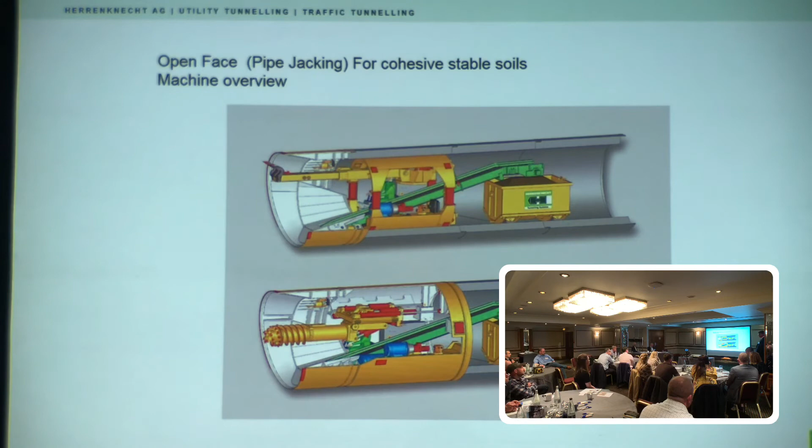People who work for Severn Trent, obviously you've had Newark and the EVA recently. This is the technique that your machines were using there. That's an EPB tunnelling machine. Segments behind the back of it. So the lining type's just slightly different, but the technique at the front and the type of machine is very similar throughout. Sizing up and sizing down.

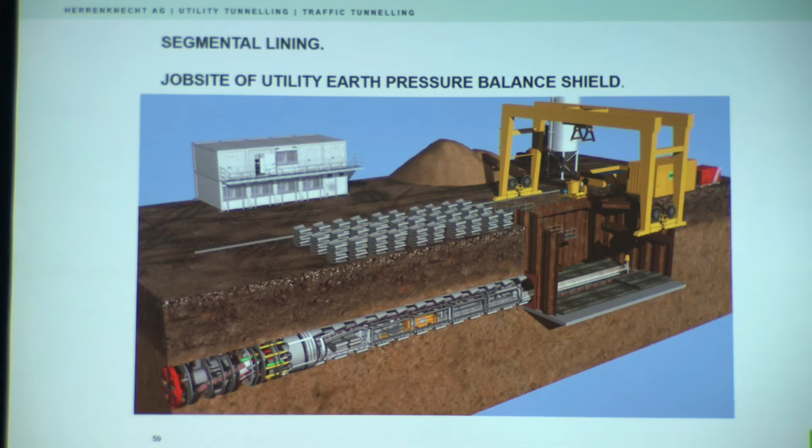That must be a scheme that I was involved with. Remember Bexon? That's what a standard tunnel looks like. You can see the segmental line. Ultra clever machines. Very rare, these would be pipe jacking machines. We've done versions of them, but they're a bit clever. They very much tend to be hard rock and dry ground, but they're out there and available.

One for the utility industry. We were asked by the German government and the German power industry, National Grid, to develop a machine that would yield very, very small tunnels that are very, very shallow. High power cables need to be shallow to dissipate heat. If you go very, very deep, you end up in a circumstance where the cables retain their heat and you have to ventilate the tunnel. And once you have to ventilate the tunnel, it has to be a big tunnel.

In order to get around this, to go long distances, to keep it shallow, this is again another technique that goes into the HDD market. So very, very shallow, 1.5 to 4 metres, though it tends to be in the 1.5 to 2, 1 to 2 metres between pipes. The machine's a 350. It pulls a plastic pipe in that's 350 in diameter. So very, very similar to what the HDD guys do, except we do it by tunnelling, less of a chance of frack out.

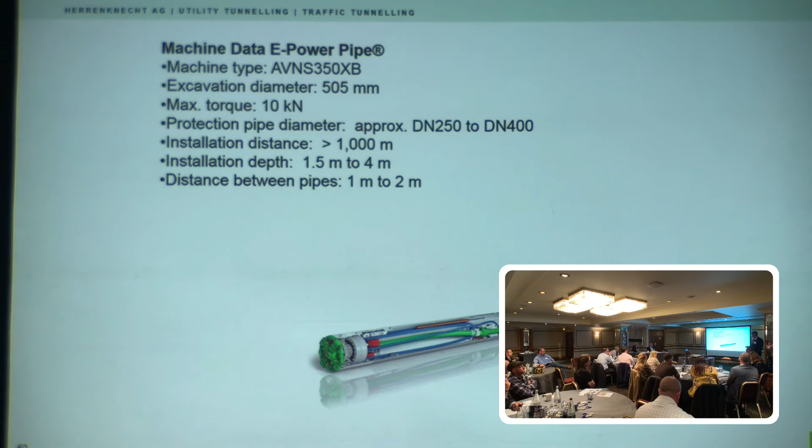And it is actually a cracking machine. We've made several of them now, and there are a couple of them in operation in both Germany and Switzerland. In fact, they're a Swiss company. Based around rack and pinion drive that you would see on HDD, rather than a jacking frame in the pit bottom. You can see the machine there, because it's very, very small, it's ultra long, it's nearly 20 metres long. Pumps and pipes and all sorts of hydraulic power packs in there.

Are you using the product pipe to push the machine? No. You can't see a product pipe, I'm sorry. The pipe that's used to shove it is a steel pipe, with all the services inside the pipe and machined ends. So the slurry lines and everything, they're all machined and they've got O-rings on them.

I knew you were going to ask something like that. You've heard the joke about the man who's supposed to throw the first stone. Jesus is standing in front of the crowd. He without sin, throw the first stone, and the stone comes whizzing in from the back. He says, "Dad, will you go away?" What a joke.

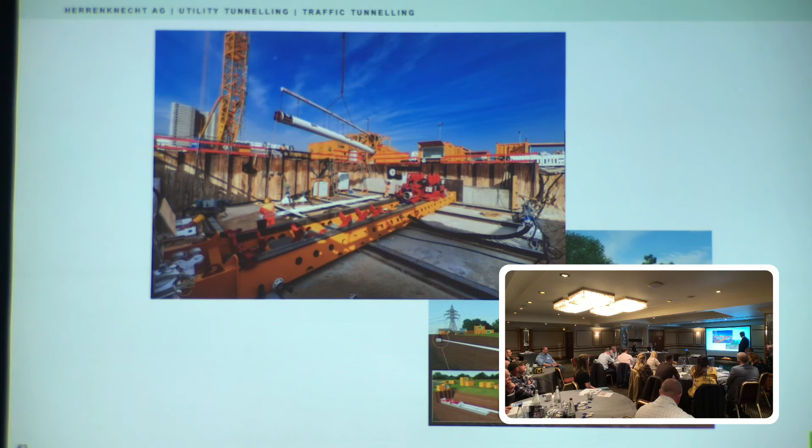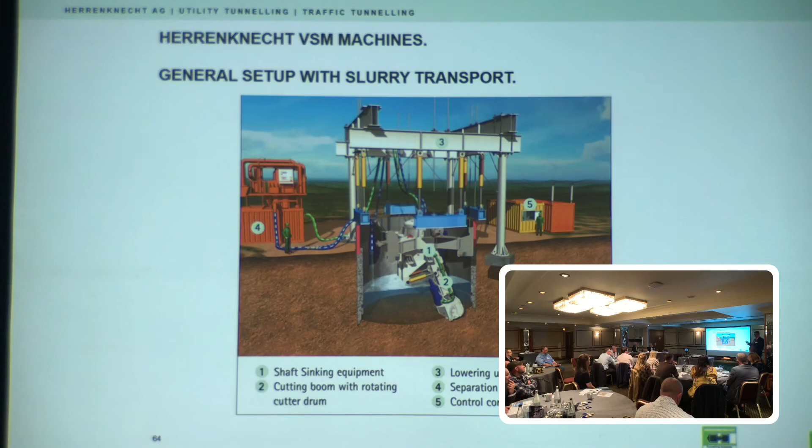Shaft sinking machine, really, really clever. I'm at the end now. You have to have very, very specific reasons to use this because it is simply Rolls-Royce technology, and it comes with a fractionally more than BMW price tag. It is for specific, complicated, difficult ground conditions in very testing locations with a lot of buildings, possible damage through settlement, high water tables, soft ground, hard ground, everything underwater. Really clever. Works a treat. I only put it in to say that there's all sorts of technology out there for doing clever things nowadays.

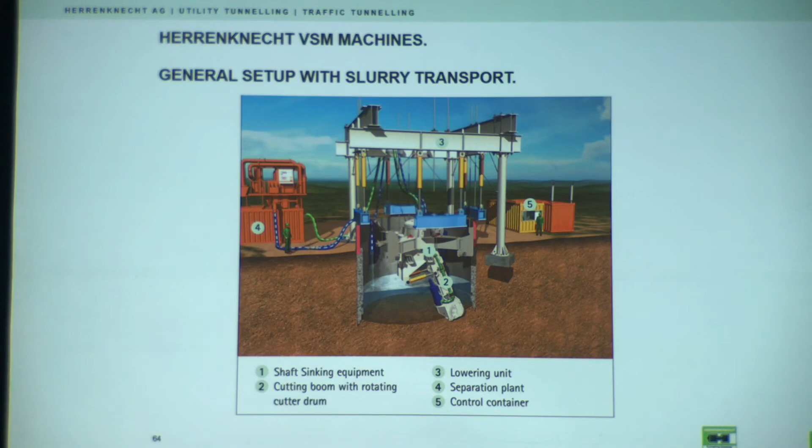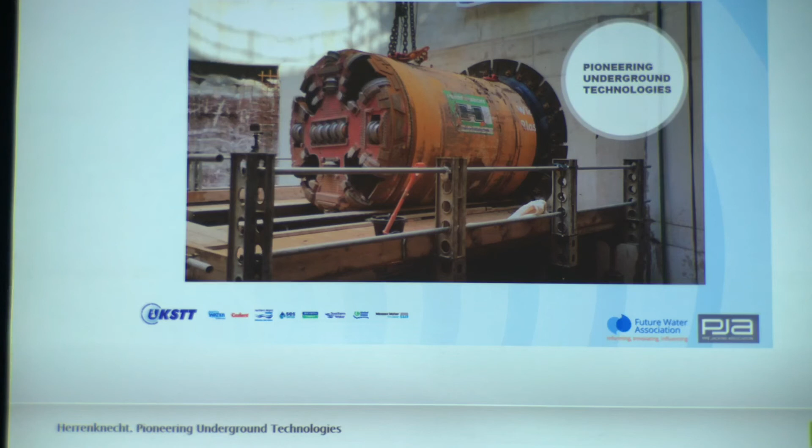Wow, look at that, 2 minutes. Brilliant. So we've got 2 minutes for questions, unless you want to eat into your coffee time. But if you have got an odd question, then let's take it now. Too keen on coffee, I think. It would seem so. Slightly worried about opening my mouth in case I sell something.